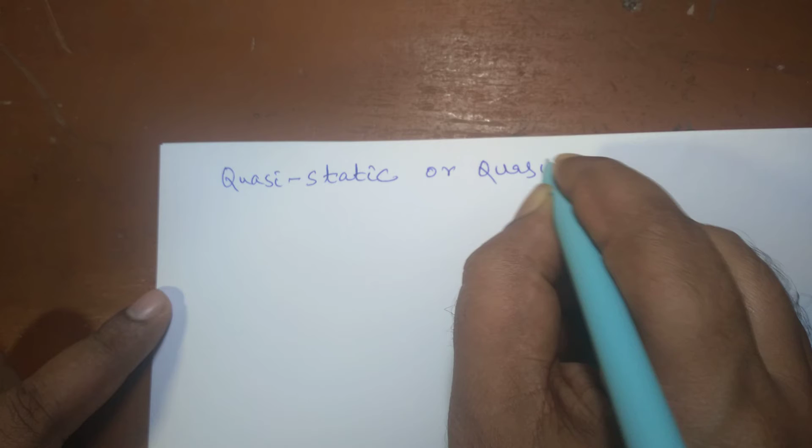So first we will discuss what is a quasi-static process. Quasi-static or quasi-equilibrium process. Quasi-static or quasi-equilibrium process.

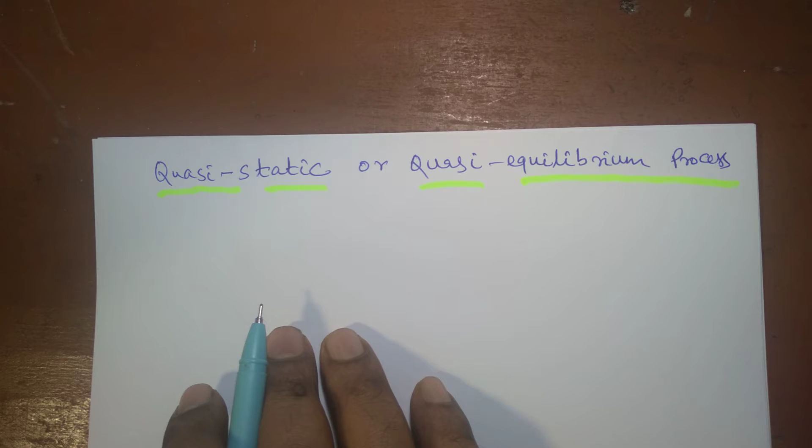You know, in nature there are two kinds of processes that occur. Some are natural processes and some others are ideal processes. All the natural processes that occur in nature are irreversible in nature, and the ideal processes are quasi-static or reversible processes. Reversible processes are in fact very slow processes which do not occur in nature.

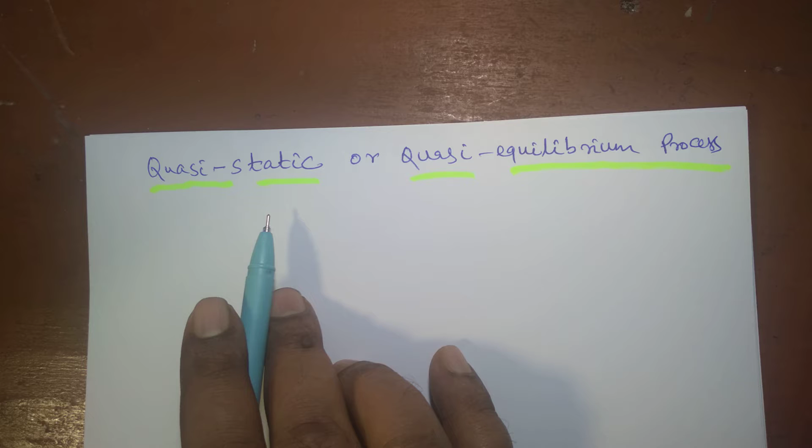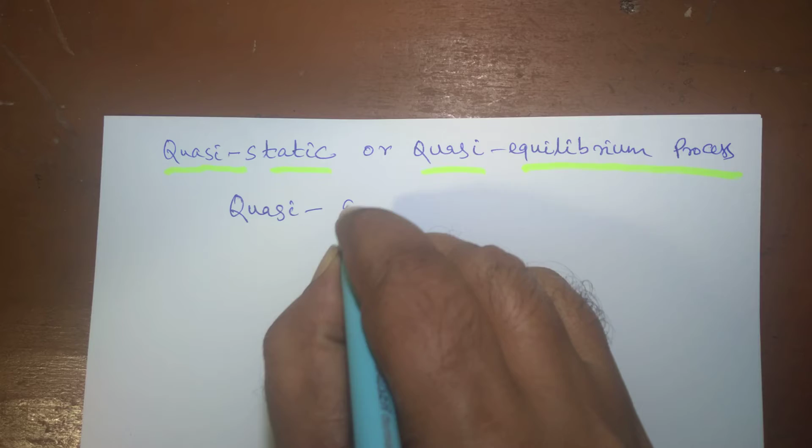It is only an ideal consideration, and the characteristic feature of all reversible processes is that they are very slow. It is infinitely slow. If you go by the literal meaning of quasi-static, quasi means almost, and static means which is not moving, the process is not dynamic, that is stagnant. That means the process occurs in a very static manner.

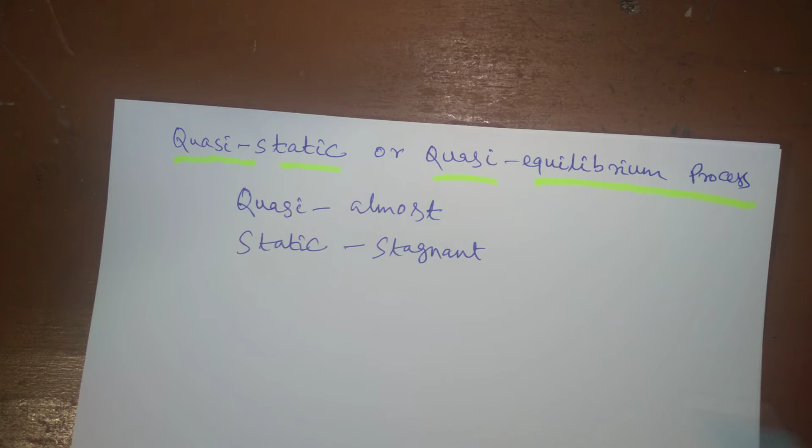In fact, thermodynamics, we know, is a study of energy interactions. So we cannot afford to study only static processes, but it is not static, it is almost static, nearly static. Because it is a very slow process, that's why it is called quasi-static process. It is almost static, and infinite slowness is the feature of this quasi-static process. So what is a quasi-static process?

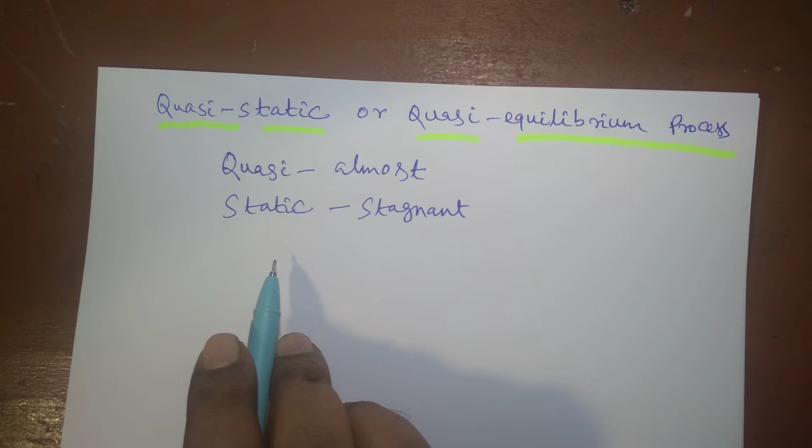I will explain. Suppose we are walking at our own pace. Suppose an old man cannot walk so fast, so he just moves very slowly. That can be an example of a quasi-static process. And in thermodynamics, if you want to find an example of a quasi-static or reversible process, it can be like this. Suppose there is a piston cylinder arrangement.

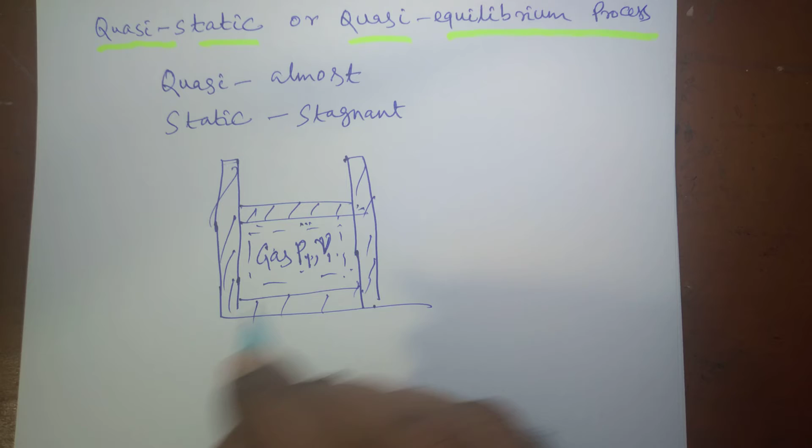Suppose this is the boundary, here gas is there, this is your piston, and this is the cylinder. This is the inner surface of the piston which can move due to gas pressure. Suppose certain gas is inside it with a pressure of P1. V1 is the specific volume at a certain state. Suppose this is the system and it is at a state at which the pressure is P1 and specific volume is V1. And there is a stop, and certain weight W is placed on the piston.

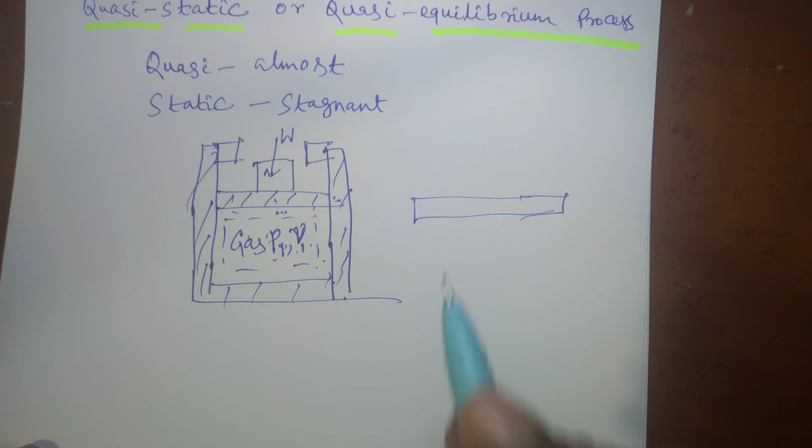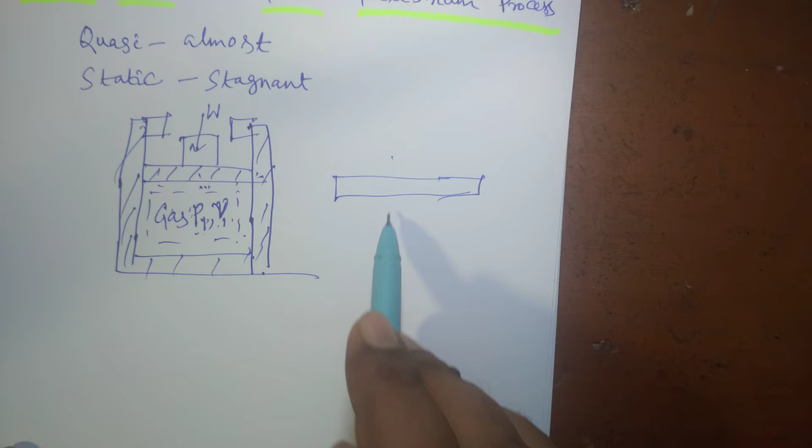So it is a state of equilibrium. If you draw the free body diagram, when a body is in equilibrium under the action of certain forces, the net force acting on the body is zero. That means the sum of forces acting in the downward direction is equal to the sum of forces acting in the upward direction. So we will find out the forces acting in the downward direction on the piston. There is a weight W acting on the piston, and the weight of the piston is also considered, suppose WP.

This is the downward force, and then atmospheric pressure. Pressure multiplied by area yields force. So when the atmospheric pressure is acting on the piston, if you multiply the cross sectional area of the piston with the atmospheric pressure, you will find some force acting in the downward direction. All three forces are acting in the downward direction: the force due to atmospheric pressure, the weight placed on the piston, and the weight of the piston itself.

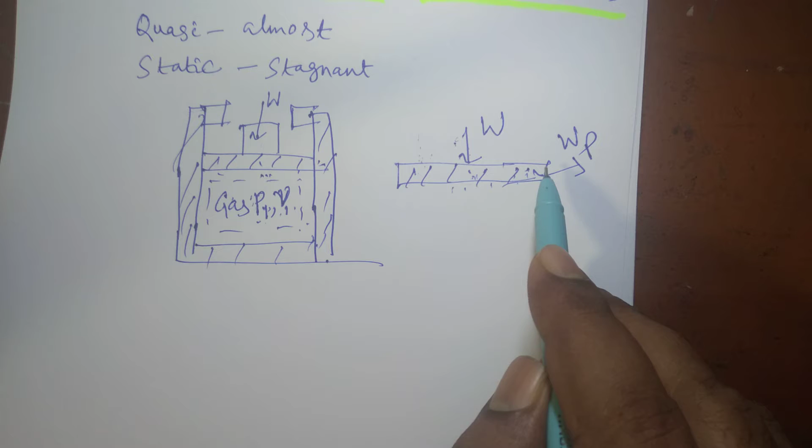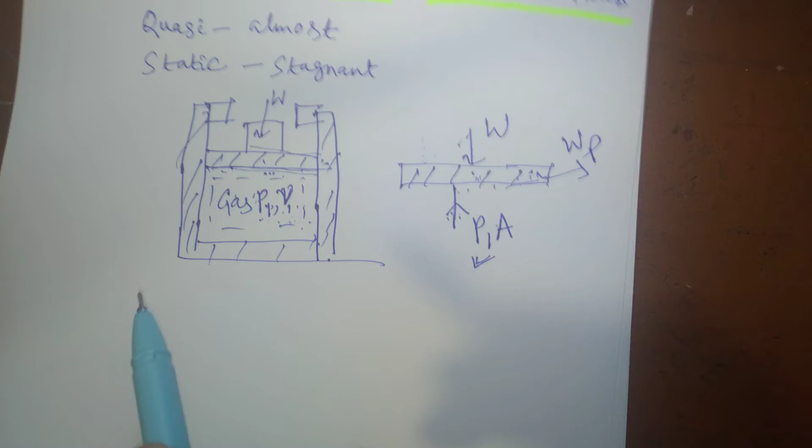These are three forces acting in the downward direction, and the only force acting in the upward direction is the force due to gas pressure. At this instant, that force is P1 multiplied by A, where P1 is the gas pressure at a certain state and A is the cross sectional area, that is the inner surface area of the piston. So this is an equilibrium, meaning net upward force is equal to net downward force.

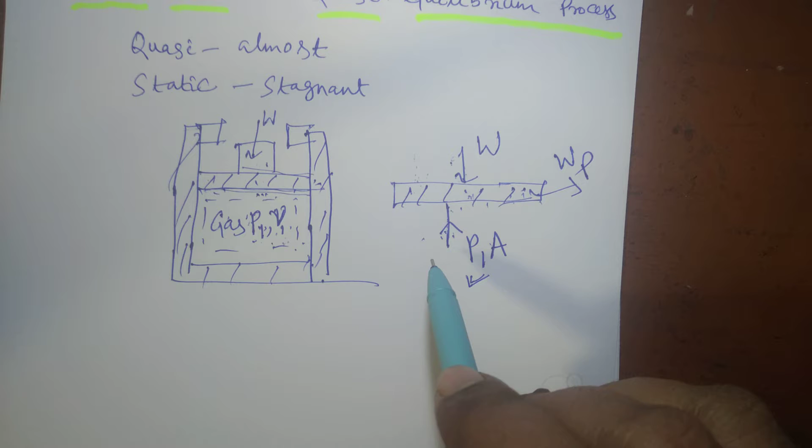Suppose I remove this weight W suddenly, then what will happen? Now the net downward force will be less than the net upward force. So the body will start moving in the upward direction. As soon as we remove the weight W, the piston will start moving upward, and it will move very fast. Suddenly you remove the weight, it will move very fast and strike the stop. It will go suddenly to this position.

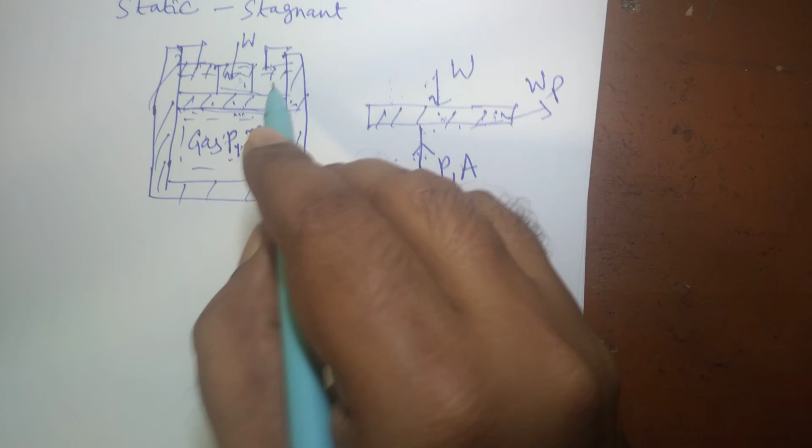It will come. The piston will move from this position to this position suddenly. And if you want to plot this process: when the piston moves towards the stops, suppose the gas pressure is P2, and this is an expansion process, so suppose the volume is V2 at that point when the piston strikes the stop.

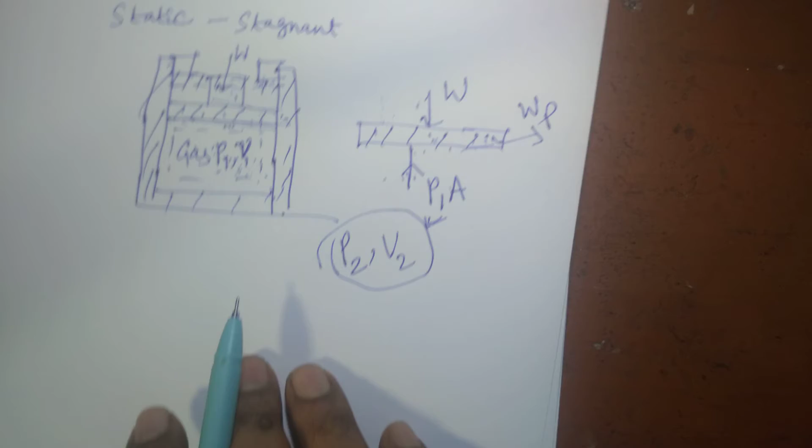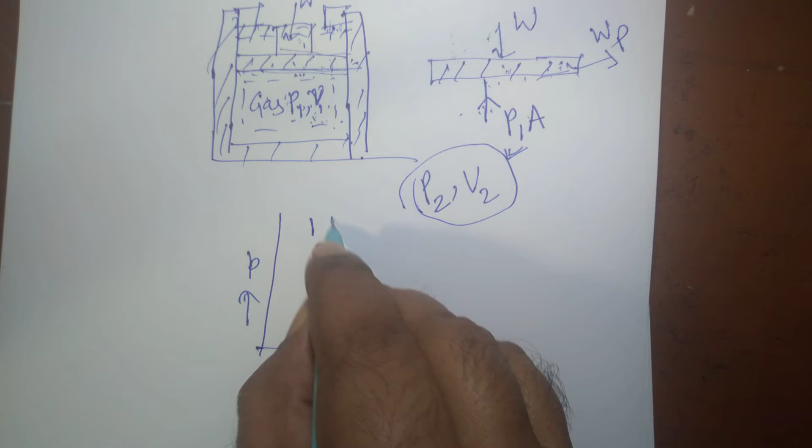So this process can be described by a PV diagram like this. According to the state postulate, this is pressure and specific volume. For fixing the state of any simple compressible system, we need two independent intensive properties, and pressure and volume are two independent intensive properties. So this process can be plotted on this PV diagram. Suppose this is state 1 and this is state 2. Here the coordinate is P1, V1, and here it is P2, V2.

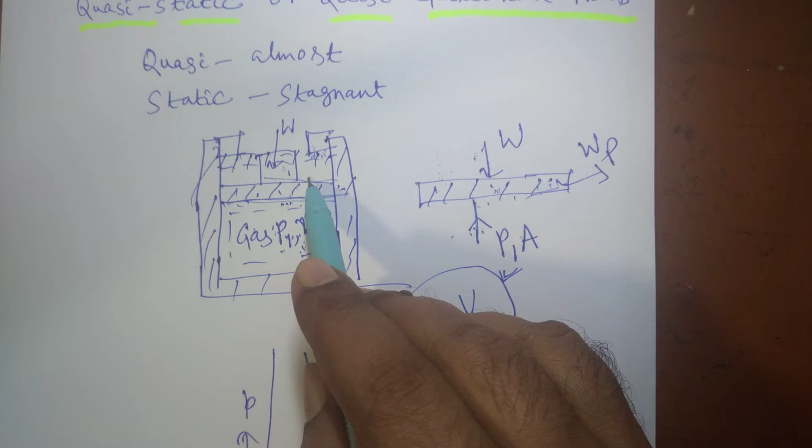But what about the intermediate states? We don't know these thermodynamic variables during the intermediate states. Here we can measure the pressure, and when the piston strikes the stops, we can find out the pressure. But for the intermediate points, we cannot find out. That's why the intermediate points are not states of equilibrium. Although the initial and final states of the process are equilibrium states, the succession of states through which the system passes from state 1 to state 2 are not equilibrium states.

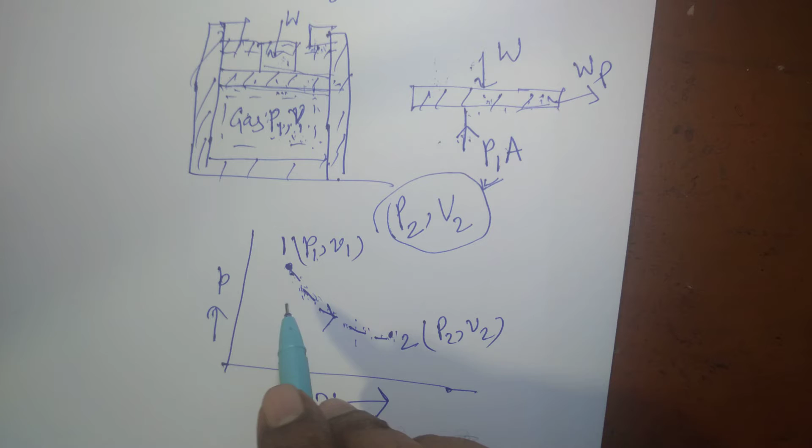So if you want to represent this process on the PV diagram, it will be a dotted line. A dotted line represents an irreversible process. It is not a quasi-static or reversible process, because this is a fast process. The significant feature of a quasi-static process is that it should be very slow. Since the piston moves very fast due to sudden removal of this weight, this is not a quasi-static process. Infinite slowness is the feature of a quasi-static process. This is a non-quasi-static process.

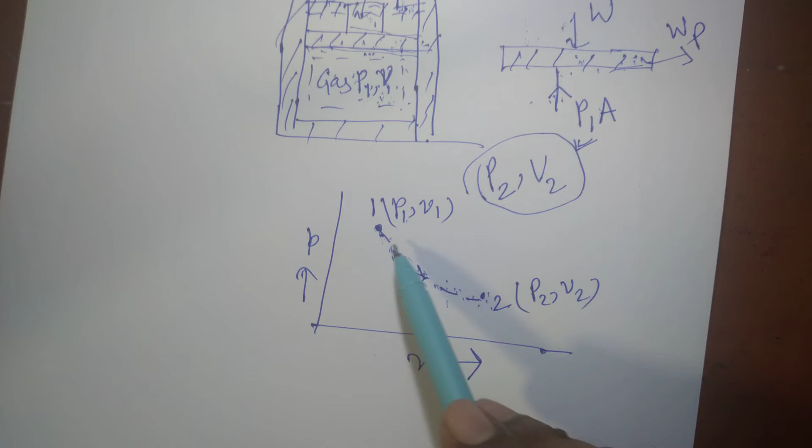Only these two are equilibrium states. The initial and final states are equilibrium states, but all the intermediate states are non-equilibrium states. That's why this is a non-quasi-static or non-quasi-equilibrium process. And how can this process be a quasi-static process? Suppose this weight... the same process can be quasi-static if it occurs like this.

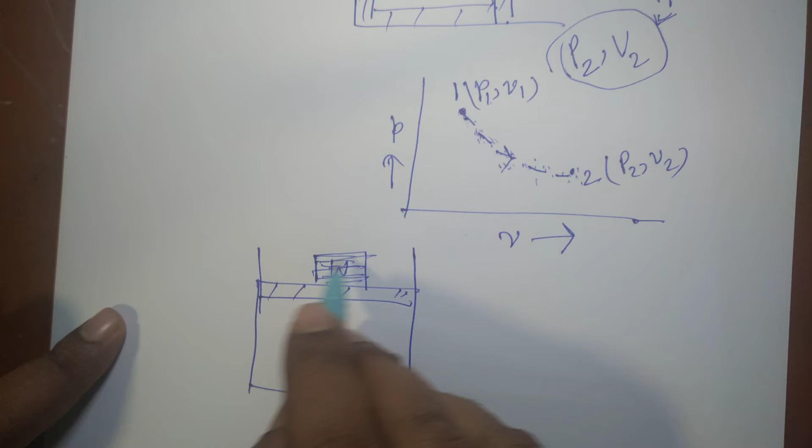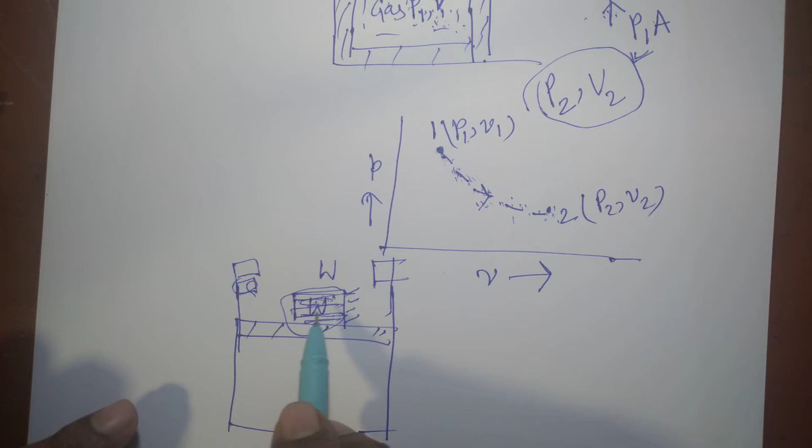Suppose this weight W is composed of several small weights, and we will remove these small weights one by one. We will not remove the whole weight at a time; we will remove the constituent small weights that together constitute the whole weight W, one by one and very slowly. Then what will happen? Then the process will take place.

The system, here meaning gas at a certain pressure and volume, will slowly move from state 1 to state 2, and during all the intermediate states we can also find out the intermediate pressure and intermediate volume, and we can draw the process diagram. This is the process diagram. So all the intermediate states are equilibrium states in this case, and this process 1-2 can be called a quasi-static, reversible, or quasi-equilibrium process.

All these states are not exactly equilibrium states, but their departure from equilibrium is infinitesimal, negligible, or quite small, because the movement occurs very slowly. The piston moves very slowly because by removing a small amount of weight, you are creating a mechanical unbalance. If there is no unbalance, there cannot be any movement. So definitely there is some unbalance, but it is quite negligible.

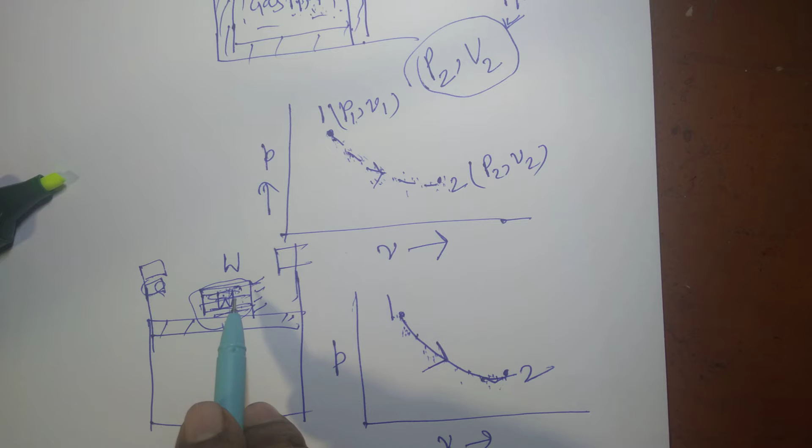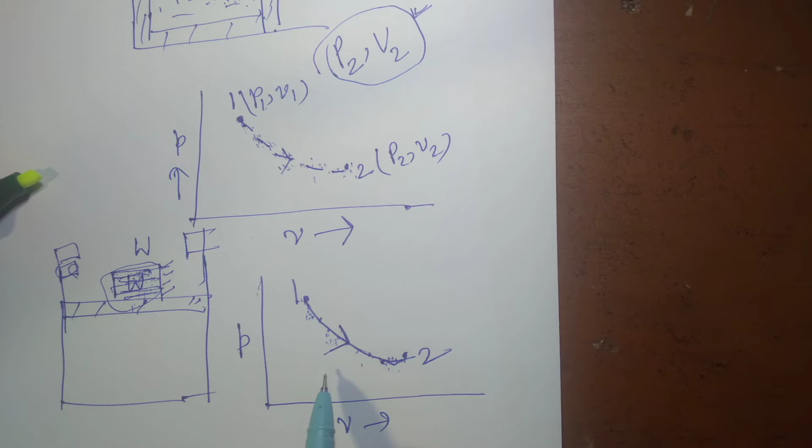Mechanical imbalance occurs if you remove some small weight, but in the earlier case you are creating an imbalance in a greater way. That's why it is not a quasi-static process; it is an irreversible process, and it cannot be represented by a full line. Reversible processes are full lines. Whenever you see a full line in thermodynamics, it means a reversible, quasi-static, or quasi-equilibrium process. So what is the significance of a quasi-static process?

And quasi-static or quasi-equilibrium processes are easy to analyze. And what is the other significance of a quasi-static process? Suppose a piston is there and a certain amount of gas is there, and suppose we compress the piston. Compress means we have to push the piston inwards.

So if you compress, we know the pressure increases. On compressing the piston, there is an increase in the pressure of the inside gas. But if you compress the piston very fast, then what happens? The molecules will be piled up in the vicinity of the piston. There will be accumulation of molecules. Gas molecules will not find sufficient time to move to other places inside the cylinder. So there will be an increase in pressure.

Definitely if there is a process of compression, there will be an increase in pressure of the gas, but that rate of increase should be uniform in case of an equilibrium state or quasi-static process. But in case of a non-quasi-static process, the rate of increase of pressure is non-uniform. Intensive properties are not uniform. Pressure is an intensive property, and it is not uniform in this case. Here the pressure will be more compared with somewhere else. So that is a non-quasi-static, non-quasi-equilibrium process.

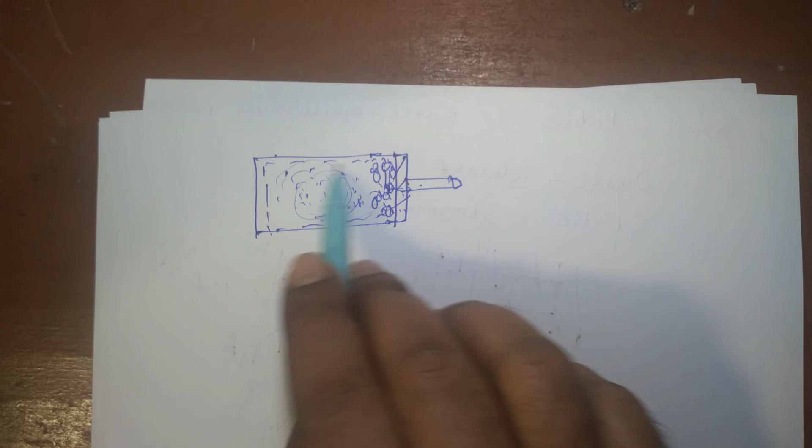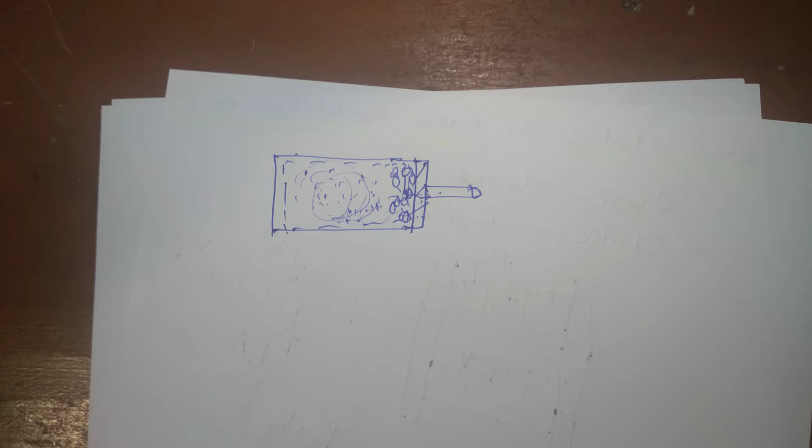But if this compression had taken place slowly, there would have been a uniform distribution of increase in pressure. Everywhere pressure would have been uniform. We know that a system is in a state of equilibrium if and only if all the intensive properties are uniform throughout the system. So this is not a quasi-static process if the distribution of pressure is not uniform.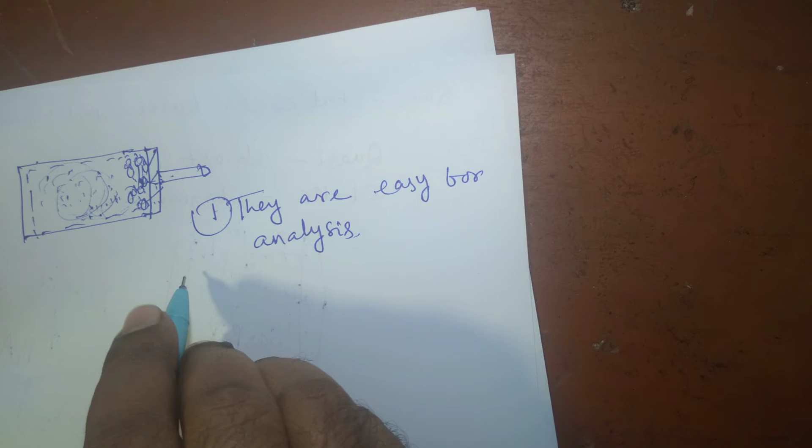And why are we actually studying the quasi-static process? If quasi-static processes are not found so much in nature, then why do we study them? The first reason is they are simple, easy for analysis. If it had been an irreversible process, you can't find thermodynamic properties at all for those states through which the process takes place. If the process is reversible or quasi-static, all the intermediate states are equilibrium states, and we can find out thermodynamic properties or variables for those states.

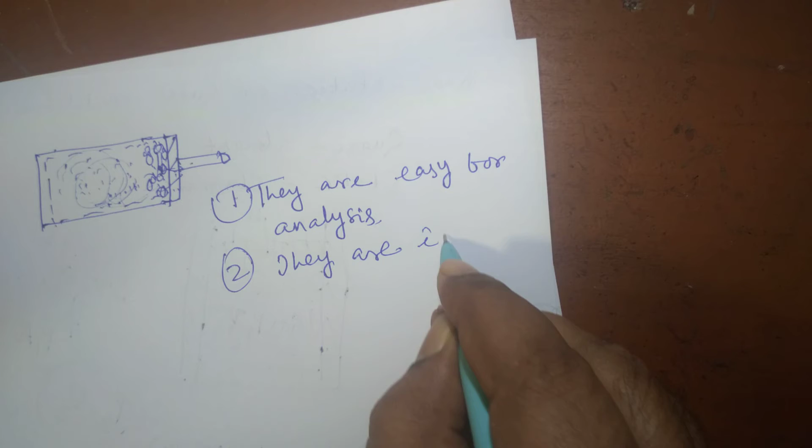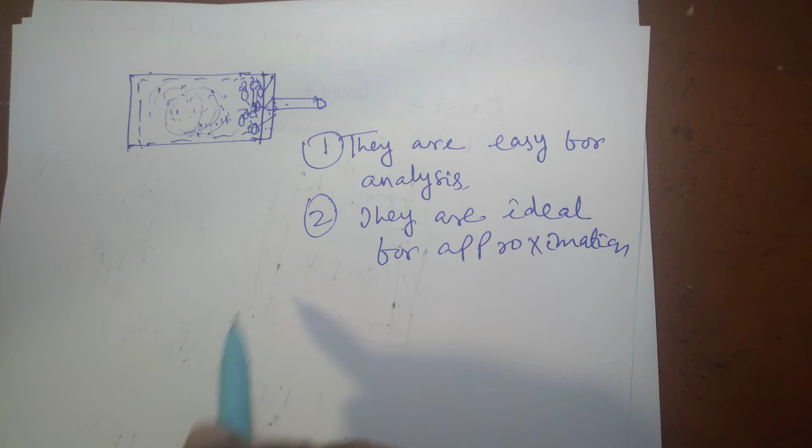Another thing is, they are ideal processes. They are ideal for approximation. What do you mean by this? In expansion of gas, pressure of the gas decreases, and in compression pressure of the gas increases. In expansion work is produced, and during compression you have to push the piston from outside, so we have to put in some work from outside. So during compression of gases, work is input to the system, and during expansion of gases, some work is produced by the system.

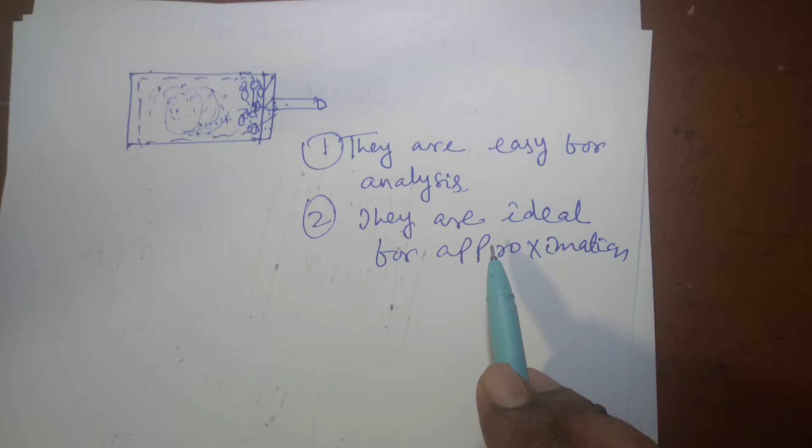So if the expansion process is quasi-static, maximum work is produced. And if the compression process is reversible or quasi-static, the least amount of work is consumed, which everyone wants. We want more and more work to be produced from any system, so that we can convert this into useful work. And in compression, we want the process to take as little work as possible, which is possible only if the process is quasi-static, quasi-equilibrium or reversible. So we would prefer any process to be reversible, to extract maximum work output and consume least work input. So they are ideal for approximation.

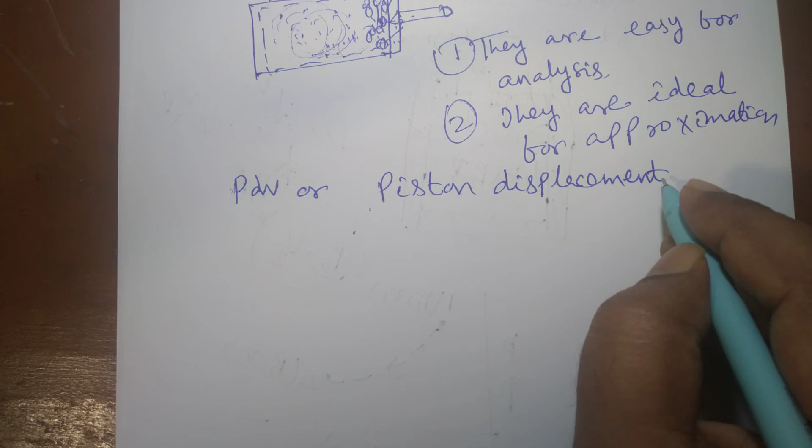As far as automobile engines are concerned, they are very fast engines. So what do we have to do? I will explain that when I explain what PdV, or piston displacement, work is. I said that the process should be extremely slow for it to be quasi-static. But in automobile engines, the processes occur very fast. So how can we find out work? PdV or piston displacement work.

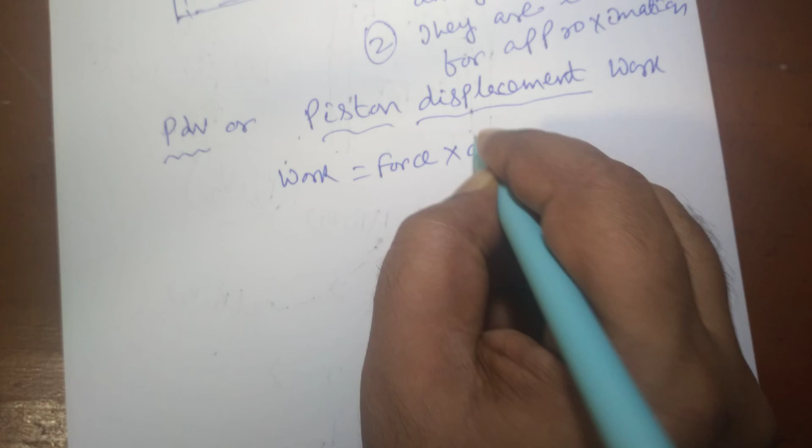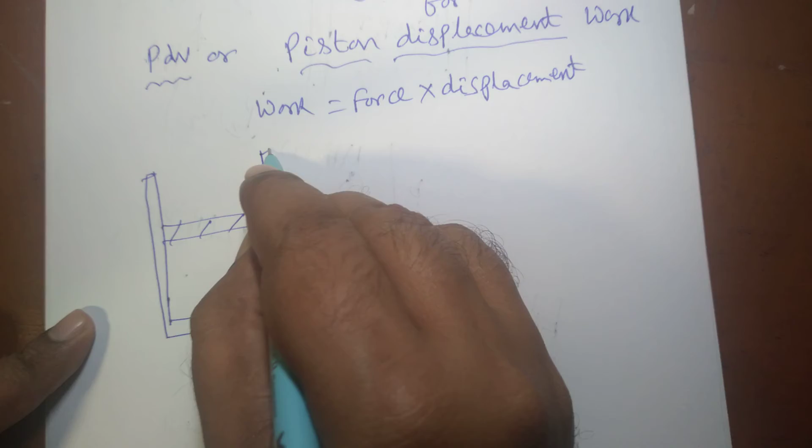So what is PdV work? It is a mechanical work. Work is force into displacement. Whenever there is some kind of displacement, definitely some work will be there. So suppose there is a certain amount of gas inside; this is again the piston cylinder arrangement. Suppose the pressure is P1 and volume is V1, and this is the boundary. This is a closed system, and this piston is assumed to be frictionless, with no viscous resistance.

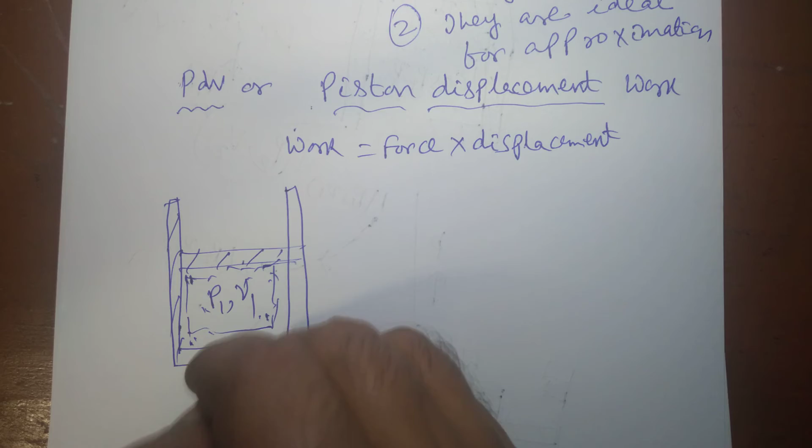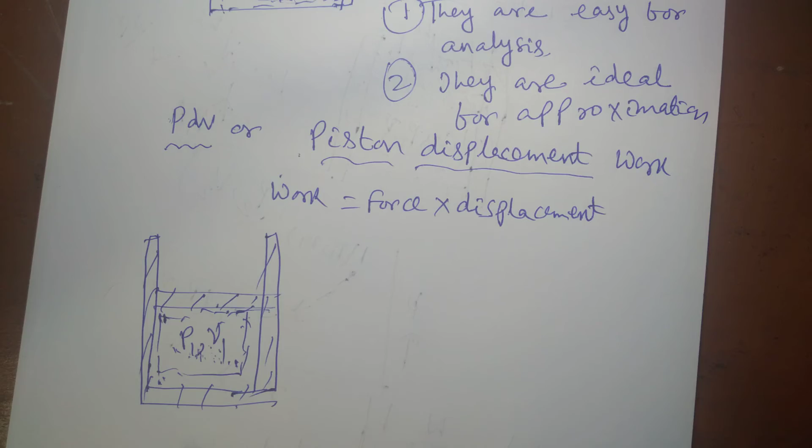Suppose the gas is at a pressure P1 and volume V1, and the system is said to exist at a state 1. We know that a system is said to exist at a state if the properties are defined for this system. So suppose this system is at state 1 with pressure P1 and specific volume V1.

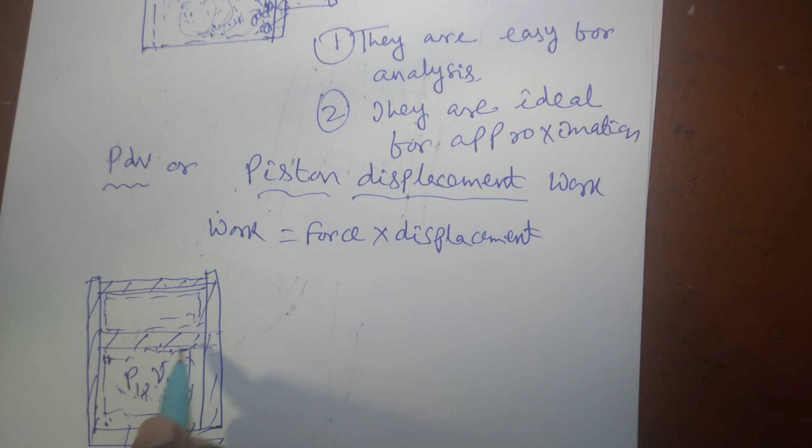Suppose this piston moves to another position, to this place, where this becomes the boundary. When the piston is here, suppose the system is at state 1, and when the piston moves here, suppose the pressure of the gas is P2 and volume is V2. Obviously it is an expansion process, meaning V2 will be greater than V1, and P2 will be less than P1 because some positive work is done.

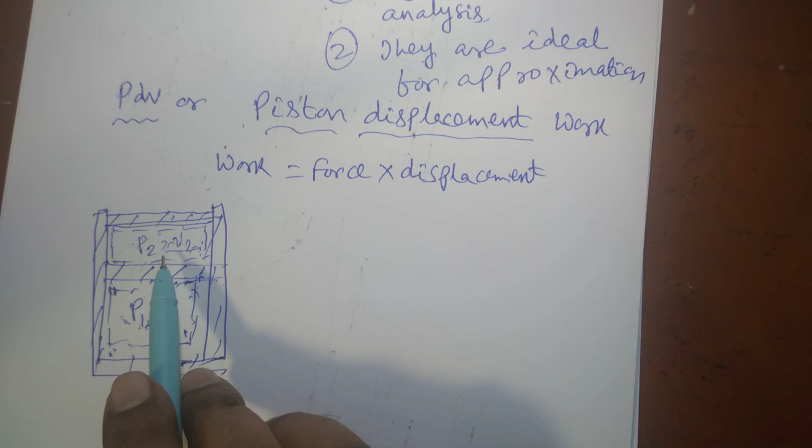To push the piston, some energy is needed. So the piston moves from this place to this place, meaning some potential energy is given to the piston. At this second position, the pressure is P2 and volume is V2. This is a state, and suppose this process takes place extremely slowly, in a quasi-static manner. Then we can define all the intermediate states.

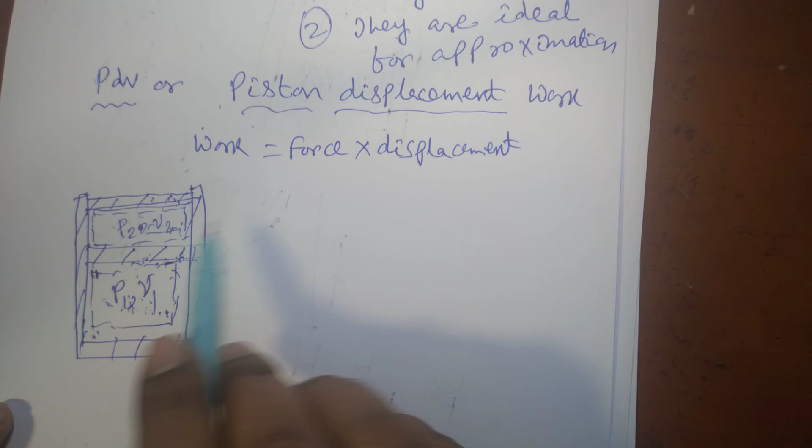Suppose this is state 1, and when this piston has reached this position, this is state 2, and pressure P2 and volume V2 are the variables at state 2. But what about the intermediate states? Because it is a quasi-static process, we can define all the variables for the intermediate states. So what is the work done we want to calculate? This is called the boundary work.

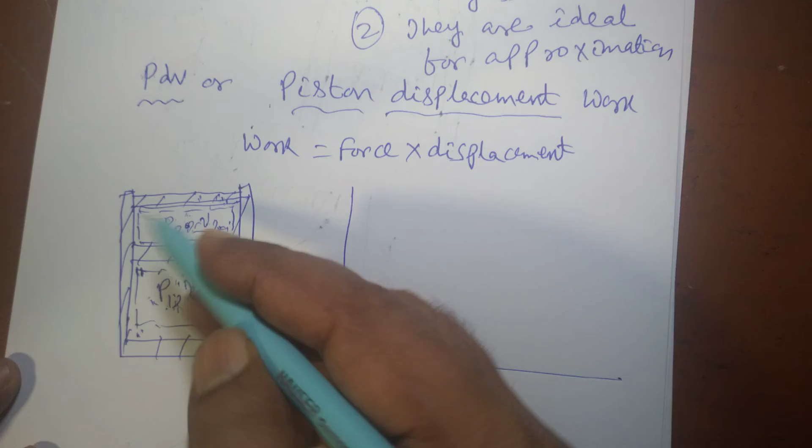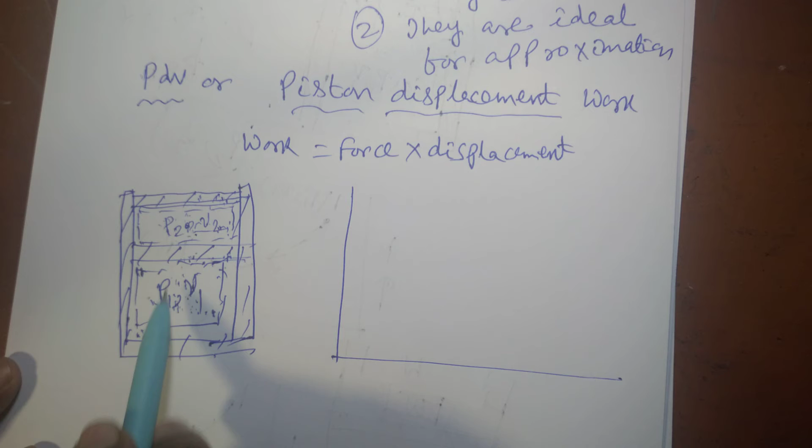Since we are moving the boundary, we are pushing the piston against the atmospheric pressure, which is acting in the opposite direction, downward. So the gas is pushing the piston against this atmospheric pressure, and that's why it has to do some work. So work is done by the system, and the system is your gas. The piston is the boundary, so this work is called boundary work.

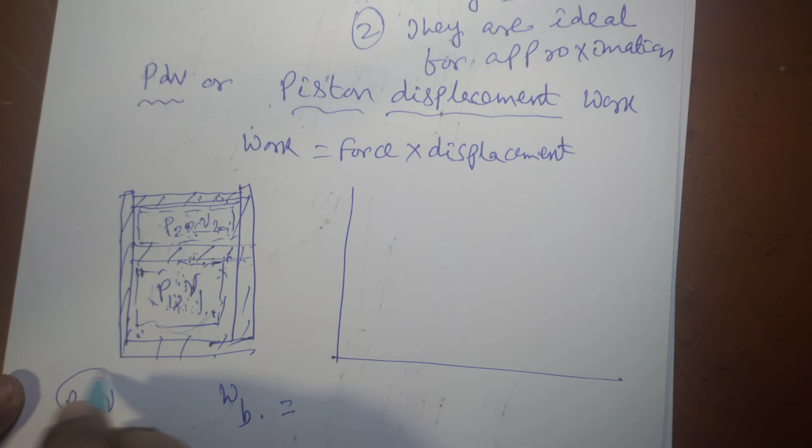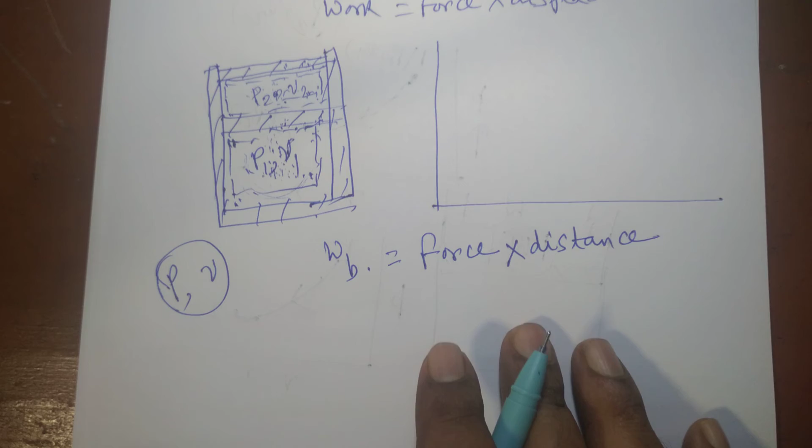And WB. This is the initial state and this is the final state; the piston moves up to this position. In between, at an intermediate state, suppose the pressure is P and volume is V. Since this is a quasi-static process, we can define all the thermodynamic variables for the intermediate states. So we want to find the boundary work or piston displacement work. WB is equal to force into distance.

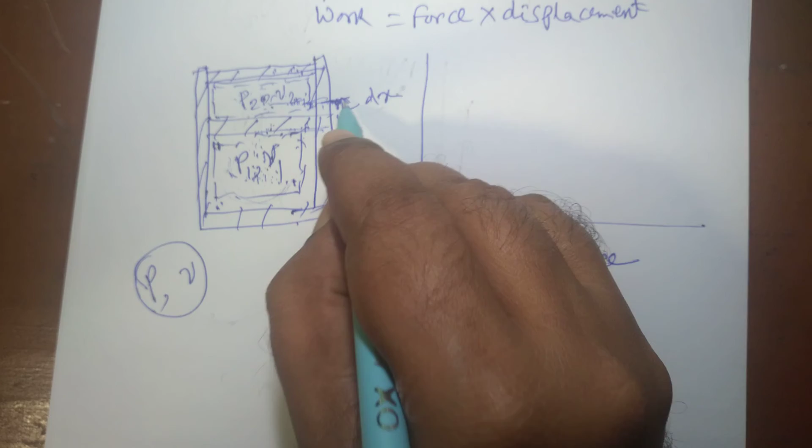During this intermediate stage, suppose the pressure is P and the piston moves a small distance dx. Between state 1 and state 2, this is a state at which the pressure is P and volume is V, and by this time the piston has moved distance dx. Then what will be the work done? This is del WB. Del WB means small boundary work, which is force into distance.

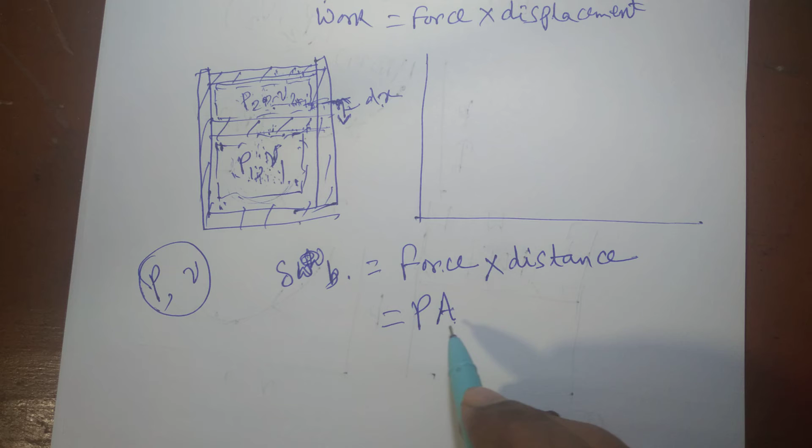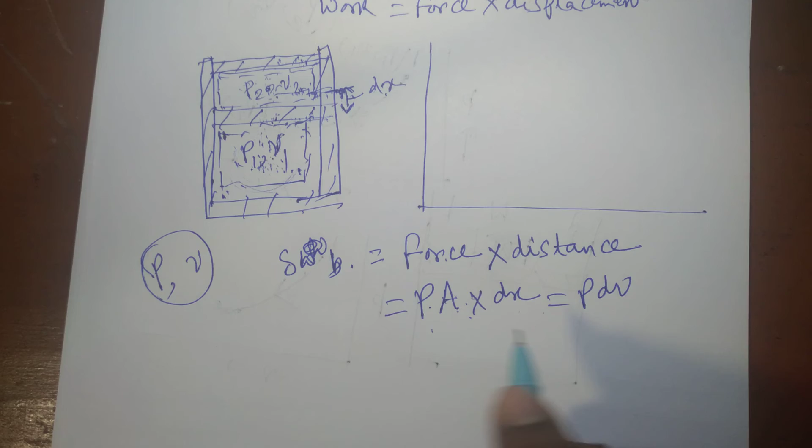Force is pressure into cross-sectional area, where A is the cross-sectional area of the piston. Pressure is force divided by area. So P into A into distance dx, as the piston has moved a small distance dx. So P A dx, which is P dV. This is the small amount of work done when the piston has moved a small distance dx and at that instant the pressure is P. That's why in every intermediate state there will be a uniform distribution of pressure, because every state is an equilibrium state.

So that means PdV is the del W. Why are we writing del W? Because work done is a path function. We cannot write dW for this. For a small change in volume, we can write dV. For a small change in pressure, we can write dP. But for a small change in work done, we can write only del W, PdV.

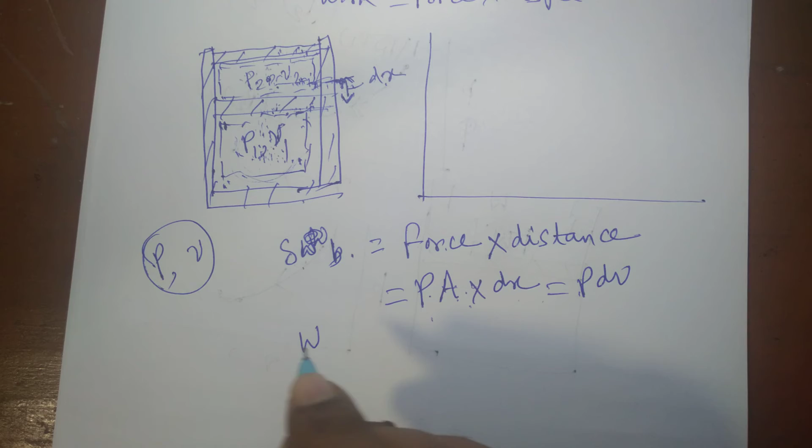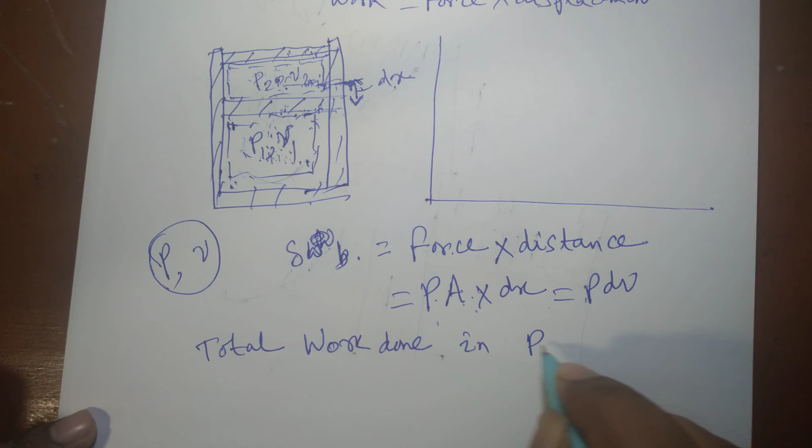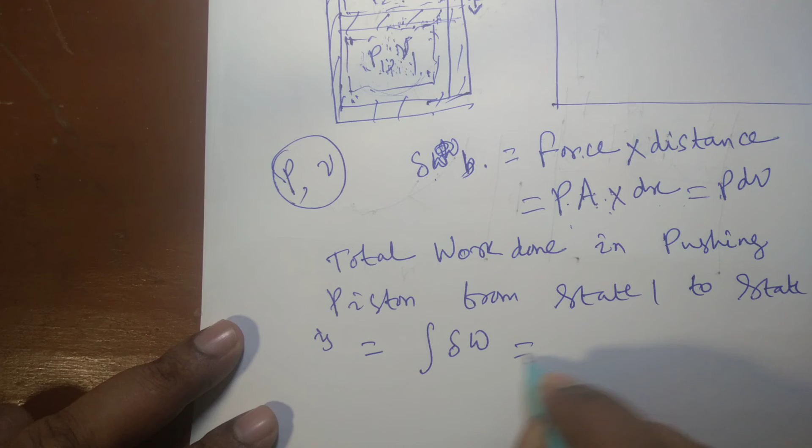And total work done in pushing the piston from state 1 to state 2 is equal to: the integral of del W will be W, so this will be the integral of P dV, and volume changes from V1 to V2, because at the initial state volume is V1 and at the final state it is V2.

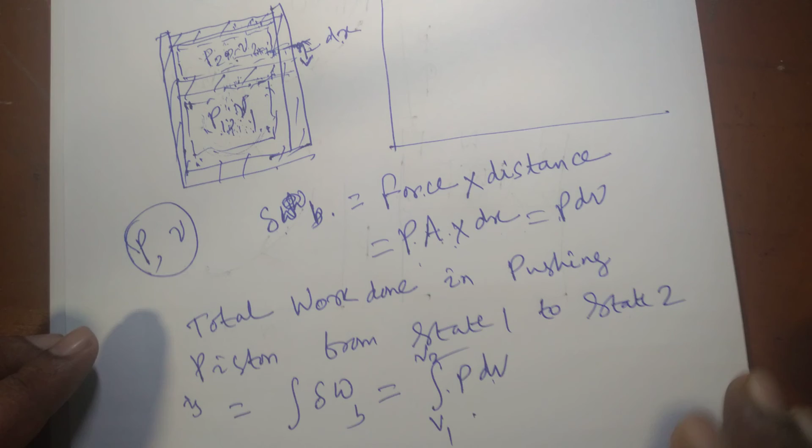So you see, this is the work done, integral of PdV, and this formula can be used only if the process is quasi-static or reversible and all the intermediate states are equilibrium states. Integration can only be done when the pressure as a function of V is given to us.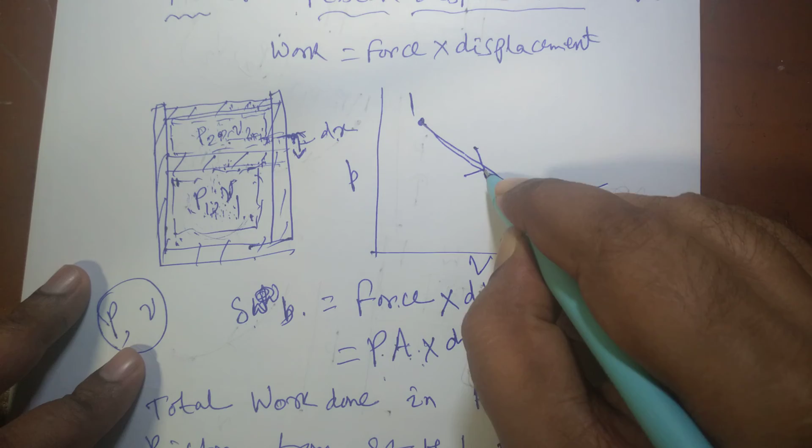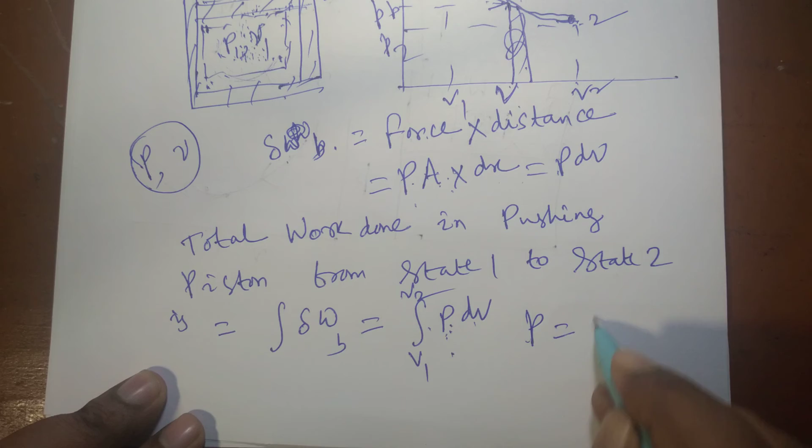Suppose this is state 1, this is P, this is V. This is state 1, this is state 2, and the system has traveled like this. Suppose this is P1 and V1, and this is V2, P2. At the intermediate stage this is P, this is V. So integration can only be done if the equation of the process path, P as a function of V, is given to us. Then only we can integrate PdV.

Suppose we don't have any equation of the process path. So how can we find out this curved line? Just by having experimental data, we can plot it. We will find the pressure and volume values at intermediate points, then join these points and find out the curved line, and work done is integral of PdV.

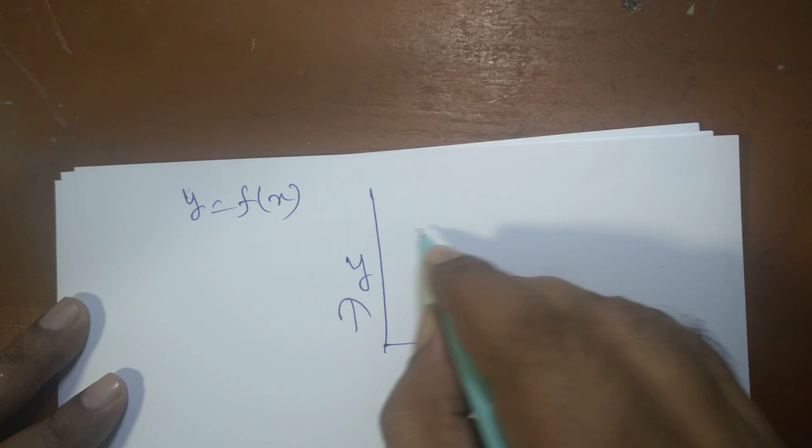From calculus we know that if this is y and this is x, and y is equal to f(x), then the integral of f(x) dx with limits x1 to x2 is equal to the area under the curve f(x) projected on the x axis.

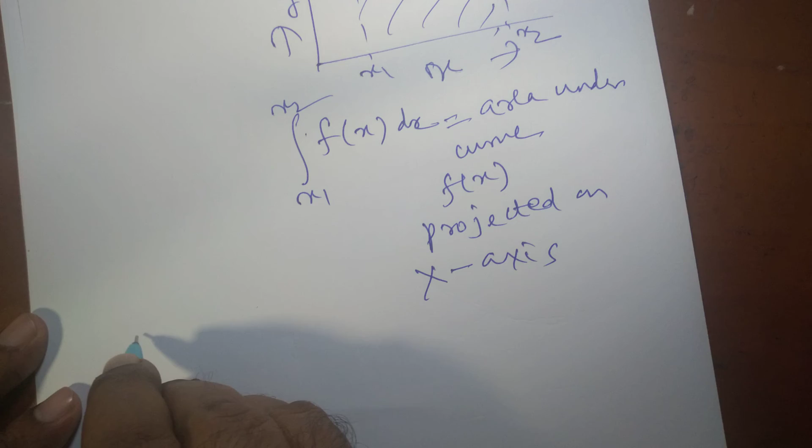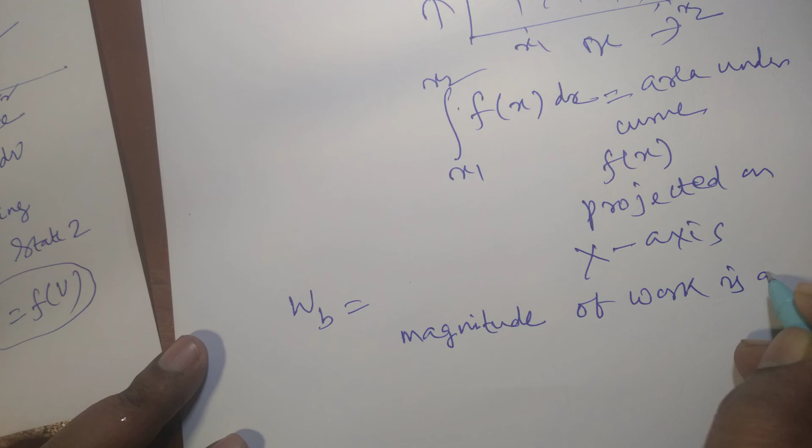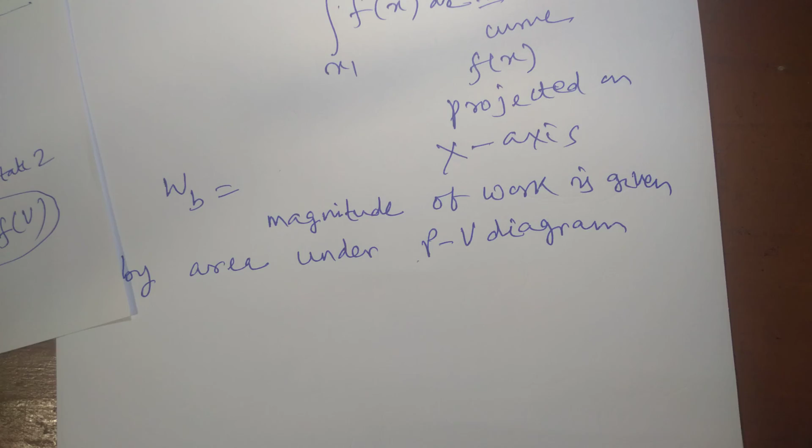Similarly, we got W, the total work done when the system has traveled from state 1 to state 2, which is the integral of PdV. That means the area under the PV diagram. So what we found out is that the magnitude of work is given by the area under the PV diagram. Area cannot be negative. That does not mean that work cannot be negative.

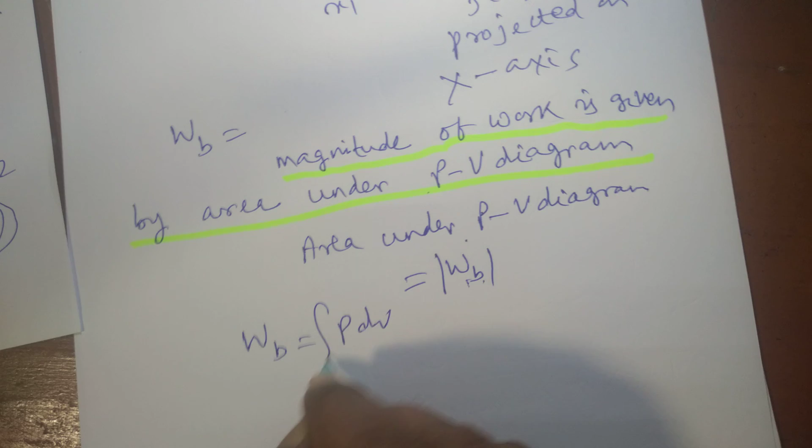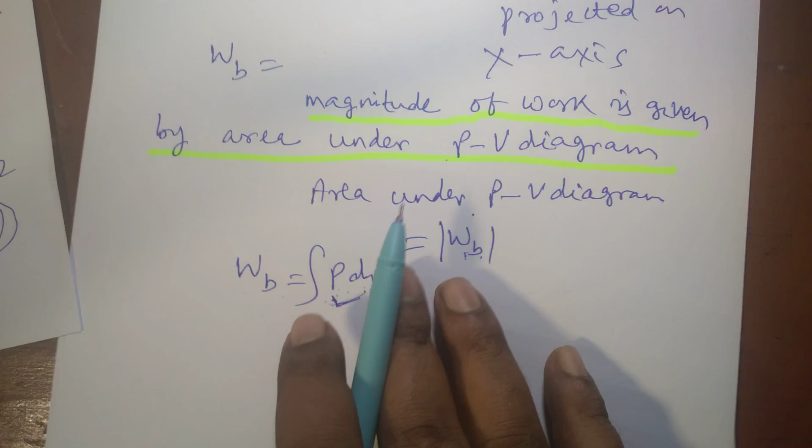So pressure is always positive. So if dV is positive, total work done will be positive, and if dV is negative, the work done is negative. dV is positive here as it goes from V1 to V2. System moves from state 1 to state 2, expansion takes place. So whenever the process is in clockwise direction, there is an expansion process.

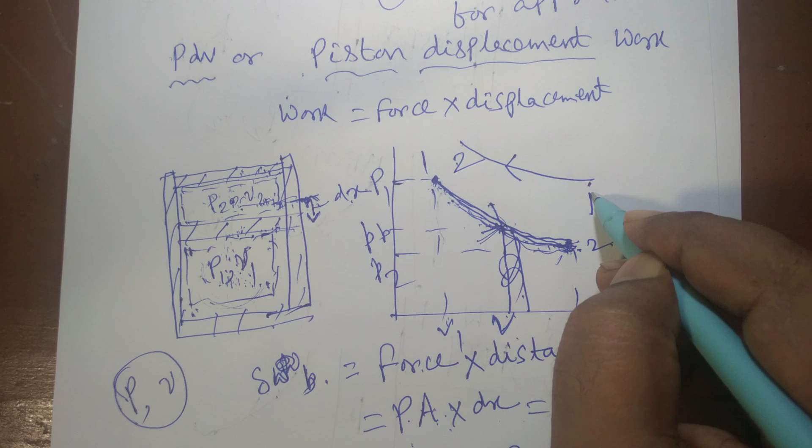If the process had occurred like this, suppose this is 1 and this is 2, then V2 is less than V1, dV is negative. That means this is a compression process and the work would have been negative. So pressure is always positive; the magnitude we find from the area, but the sign of work done we can find out from dV.

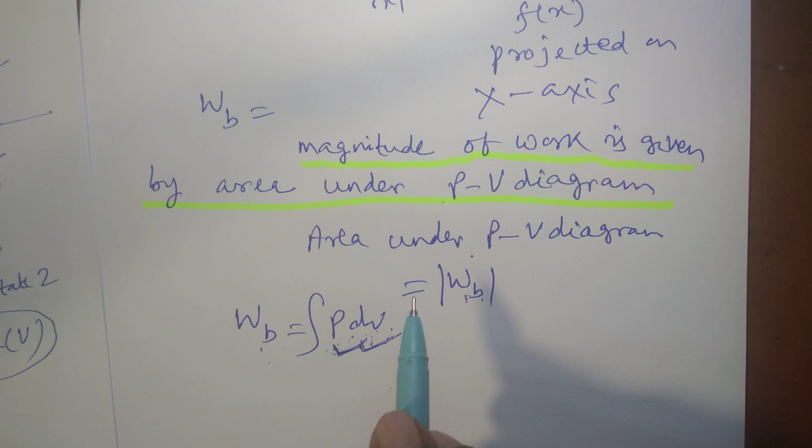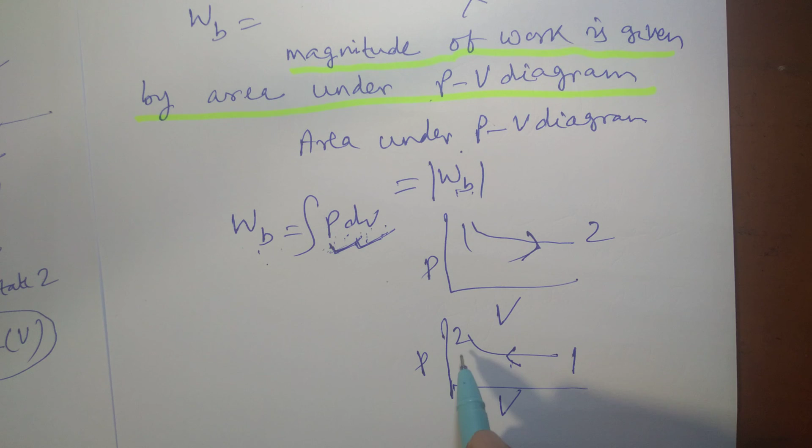If dV is positive, that will be positive work done, or work done by the system, and if dV is negative, the work done will be on the system, for a compression process. It can also be found from whether the curve is in the clockwise direction. Suppose this is the PV diagram, and the process like this is an expansion. If the process is like this, it is compression, work done is on the system with negative sign. And from the area under the curve we find the magnitude of work done.